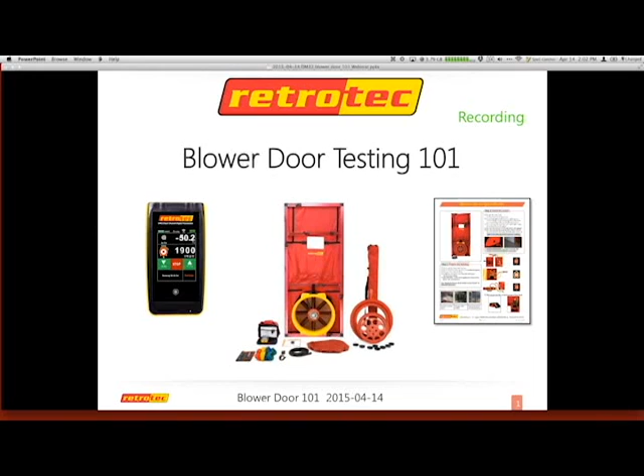All right, so today we're going to go through some basic reasons to test. What are some of the code requirements? BlowerDoor quality control, how to test out of order, ways to ensure accuracy of your gauge and your fan, and common test problems and solutions.

I found that many of these things are very helpful when I get people responding about issues they're having or conditions they've learned or solved. I thought there was another slide that may not have shown up, so if there's something you want to make sure I'm addressing, let me know. I did not do any polls today because sometimes I feel they get in the way, so I'm just going to ask you some questions and hopefully get a response in the question and answer area.

For those of you that have the DM32 Smart Gauge, which will be one of my questions in a minute, make sure your firmware is up to date. You plug in your DM32 with a USB cable to your PC, open the gauge configurator, and it will find your gauge. If it doesn't find your gauge immediately, unplug it and plug it back in. If this is the first time and it has a hard time, or you get funky sounds acting as though it cannot find your gauge, you may need to update or make sure you have the right drivers installed. All of that can be downloaded from the Retrotec website.

Right now they are currently on version 49. You can see that on your gauge if you go through settings on the last screen - it'll tell you what your firmware is. So you want to make sure you're up to date on your firmware, and this is something you definitely want to check at least once a month.

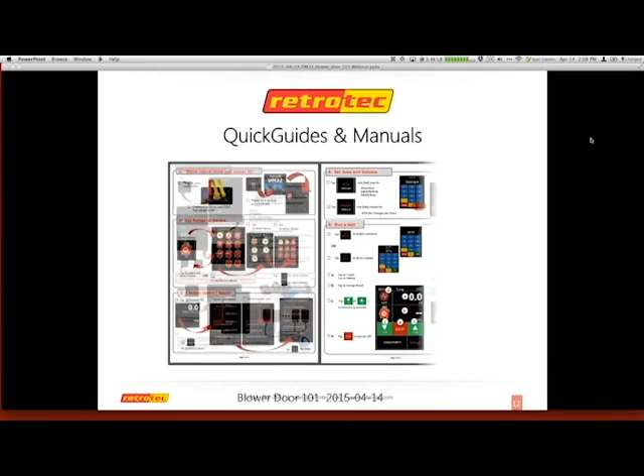As this slide goes around, I have a few questions I'm trying to find out. First one is, where are you? We reached back out to our European allies and friends, but somehow they were not on some of the email lists that were sent out. So what I'm trying to find out is, what state are you in, what country are you in? That would help me orientate my session today as to what kind of folks I have out there. We got a few from Texas and Indiana.

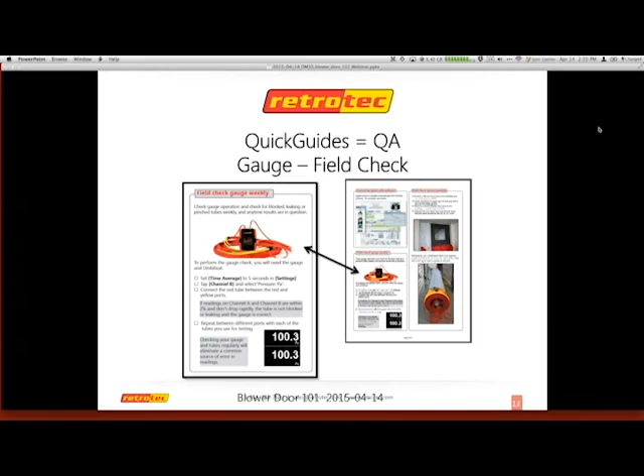One of the things I do want to remind people about is the DM32 will control Minneapolis fans, right? The duct blaster or the blower door version 3, the 220, or the 110. It also does the true flow grid or the exhaust fan flow meter. All those things are actually able to be accessed on the DM32 smart gauge. For those of you who have the DM2, it would read these devices, but it would not control them. So now there's actually an adapter that can be used with the DM32 smart gauge to do that.

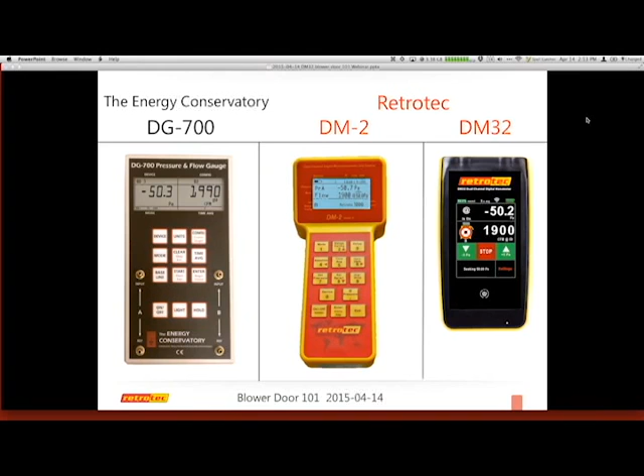Okay, so if you could let me know what's your market sector. I know this is kind of a, Jay West hates the word industry, but it's kind of like, what's your industry? Are you a HERS rater, BPI, weatherization, code official, just energy auditor, oversee programs, HVAC contractor, anything that fits any of your descriptions on how you may describe yourself when you're at church or a social gathering. That would help me a lot.

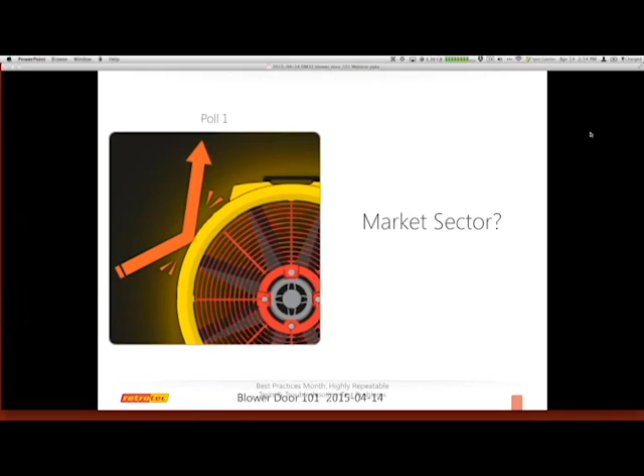It lets me know where you're at or what you're doing. And how do you describe yourself in your job title? They may be one and the same, but my goal is to kind of get a feel for what kind of folks do we have out there and what you're doing.

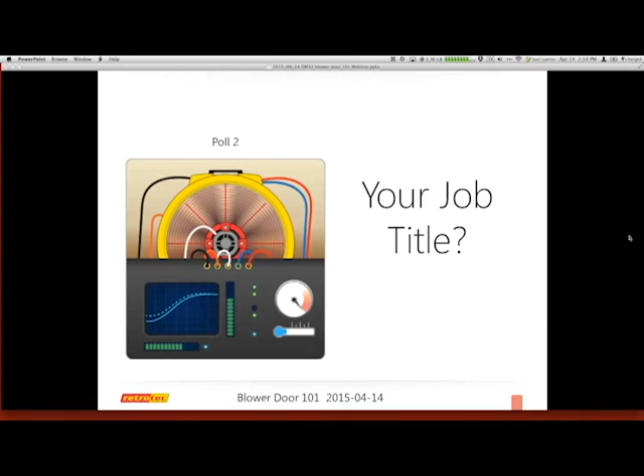So many things we'll be talking about are very similar to BPI protocols and HERS applications. So some people may be more administrative that are on our call today, some may be actually in the field. So my goal is to make sure you understand a variety of stuff.

So I'm going to start first with the QA part of this, and that is how to do a field check on your fan. How do you know that your fan is working correctly?

So it's easy to check your gauge because you can actually take tubing from one side and put it in the other side and go back and forth. But your fan is a little more challenging, and your gauge could be off by 1 or 2% in theory, and it will not affect your results drastically. If your fan is off, that will actually skew your results much more extremely than your gauge could. Because even when you extrapolate 1 Pascal in terms of the CFM, it's not a large result. But if your fan is off by 10%, now you actually have a large discrepancy as to what your results might be. So here's the scenario.

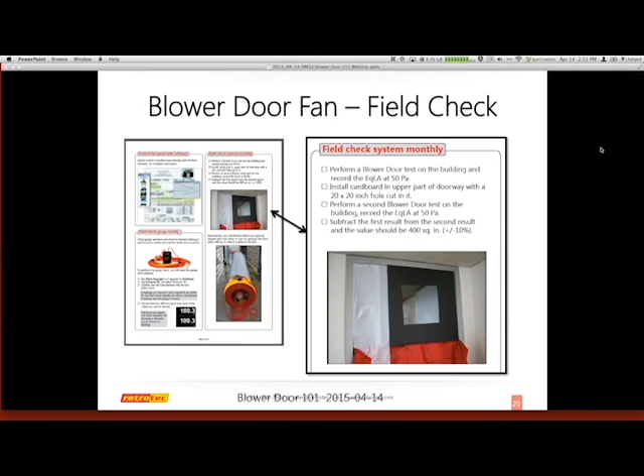You can follow the quick guide on how to do that. These quick guides can be downloaded from retrotec.com on the same page under manuals and quick guides.

So what I'm going to do is set up my BlowerDoor in a small area. You can use a bathroom, you can use a closet, it works best, a very small bedroom. The smaller the room, the easier it is to actually do this type of a test. What we want to do is test the leakage of this room to try and find out what it is and use that as a baseline or a neutral number. And then I can use that in terms of subtracting how much leakage it has.

So what I'm going to do is set up my little room. If you're going to use that bathroom, you've got to make sure you cover the register and the fan, because those are actually leakage points that you really don't want to have. So if there's any kind of opening that's a known opening in this little room, it should be covered in general.

All right, so here's my process. I'm going to take the room. What I did was actually cut a piece of plywood. You can use a piece of rigid cardboard, you can use a variety of things that are firm enough to handle the wind in the test itself.

I went to the gauge, under results to be displayed. You can access this by just tapping channel B, or under settings at the bottom, you can do results to be displayed. Then you tap the little dots, and the second screen shows EQLA in square inches.

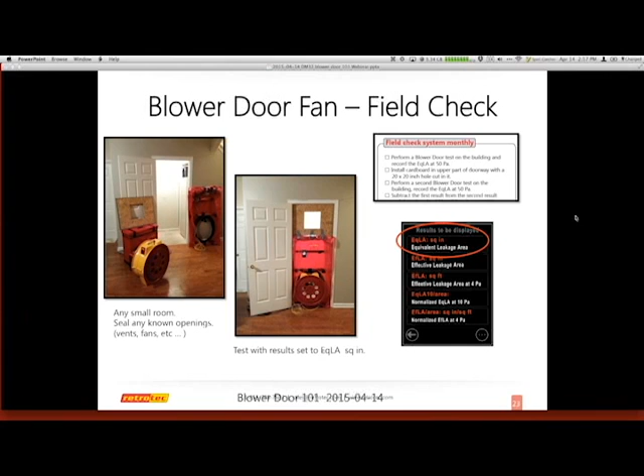I know the opening I have is 12 by 12, so that's 144 square inches. You can test at 25 or 50 Pascals, making sure everything is secure if you're going to go to 50. The results of my first test with the opening in my cutout gave me an equivalent leakage of 168 square inches.

That's actually what I measured. Then I'm going to cover the opening and do the same test again, and now the only thing I'll have is the background leakage. My results were 24 square inches of leakage that's naturally in the room.

So what I do is take my 168 square inches, subtract 24 from it, and I get 144 square inches. In this scenario, I was dead on, just to show you what the numbers could look like.

So again, you test it once, and you can do the same pressure for each test. Test it once with the opening so that air is coming right back at you once it fills up the room -- I'm blowing into the little room itself -- and then I can cover that back up. My goal is to find the difference between the two.

This is a great way to practice or play with your blower door. Sometimes on cold days, or other days where you don't want to mess with the conditioned air in your house, you can use this same method.

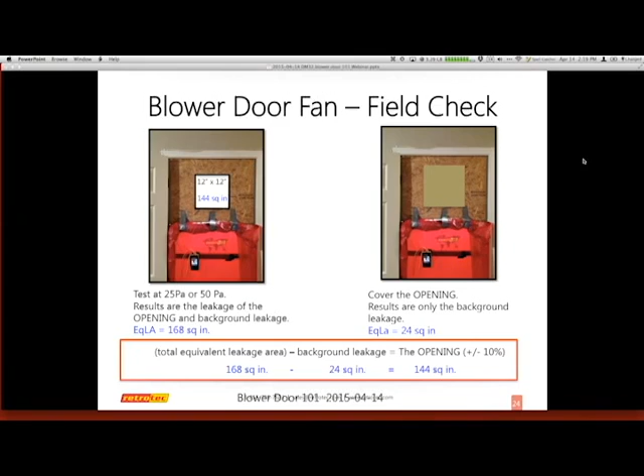Some of the reasons people test are to do energy audits, find conditions, improve the performance of the house, or for a variety of code requirements.

I appreciate all of the European folks that are out there. I'm not as savvy or up to date on some of the testing protocols that you guys are required to do. In general, it's a blower door with a number and a criteria.

But some of the stuff I'll talk about is mostly the American energy code, and I've been instructed to get more up to date with your codes. Starting next month, we will have these same webinars designed for your specific standards, using your same types of units of measure.

To me, there are two ways of doing the test. Let me go back to this slide previously. So if I'm going to do a code test or a RESNET test or something with a specific standard -- the European equivalents, France has theirs -- there's a lot of them out there, and they have a protocol to follow.

Or I'm just doing a test to see what the performance of the house is, usually an existing home. I have two options -- I don't really have a slide for that, but it's a discussion in general. If I'm going to a house that's an older home, it may have suspect conditions or a variety of issues, and I can pressurize or depressurize. Those are your choices on how you want to decide what type of test to do.

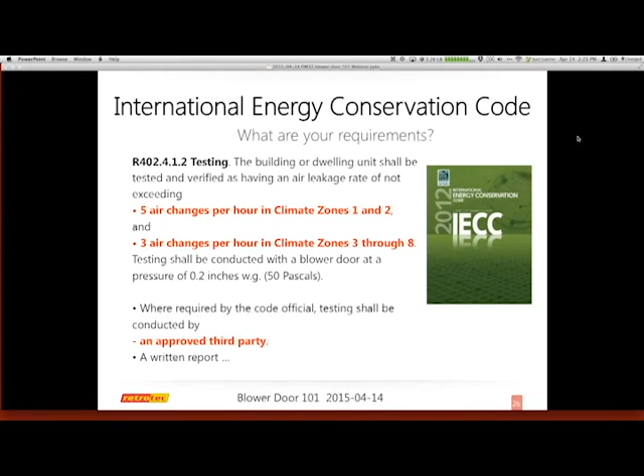So who gets to do the test is dependent upon your municipality or what your code official is, or who's allowed to do that - it's very vague and has its own criteria in general. Most people accept, obviously, an energy code official to do the test. Some allow BPI, HERS raters, or other similar certifications. Some are beginning to allow the manufacturer certification.

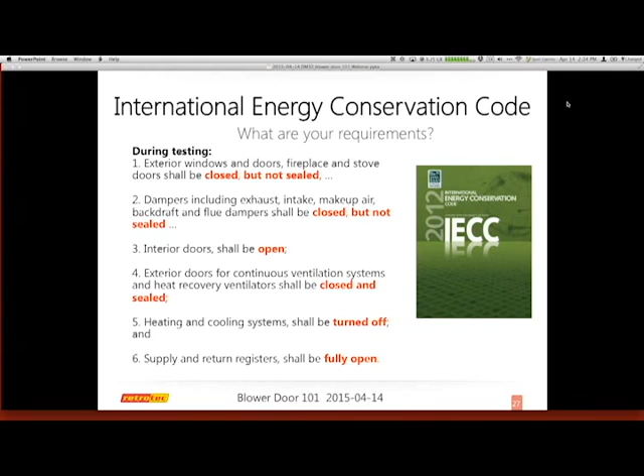What you need to do for a blower door test for the energy code is incredibly minimal. It basically just says that windows or dampers or interior doors just basically opened or closed, but nothing can be sealed. If there's a dryer vent missing from the laundry area, you're not allowed to cover that opening - there's a damper on the other side that should now be in effect. So it's basically as is - your goal is to seal the house up on the exterior shell, open the interior up, and now you're actually ready to go. You do not seal the registers, to make sure we're on that same page.

So for the IECC, there are some very large items that are missing, and I think they've realized this and are working on a better testing method.

So there's nothing about combustion safety. They kind of feel as though it's a new house and those things shouldn't really exist, even though gas is probably on - the furnace and hot water tank have already been prepped and ready to go. This is ready for occupancy, and you're coming into your test. So you do want to make sure a variety of things are either off or not able to come on.

It doesn't cover issues about baseline or windy days. What's the technical way to measure the structure? What are the equipment requirements, the certifications? A variety of stuff has kind of been left out. So I think in the next scenario, which is going to be the 2018 code, these things will begin to be resolved.

Just for a general comparison here, the energy conservation code in general for residential is about 11 to 12 pages. It's not a large, exhaustive document, but the part that covers testing is only about a quarter of a page.

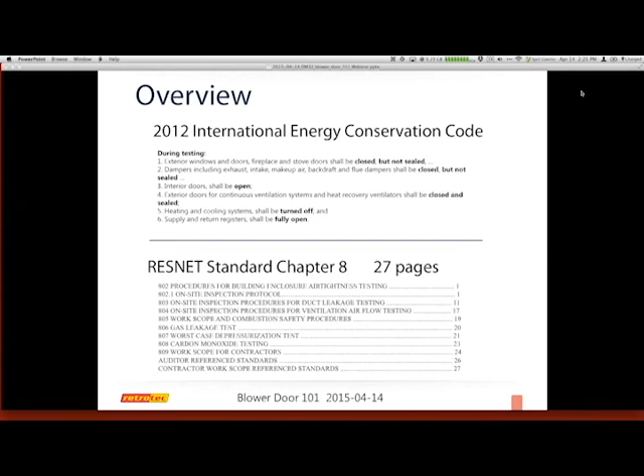And if you compare that to the RESNET standard of Chapter 8, it's about 27 pages that covers all of the details on how to do a blower door test. So I think you're going to find that these two things are going to be slowly merging, and the code will start to adopt many of these conditions that RESNET has or many other testing standards have.

I'll do some things briefly about the air barrier and some other stuff.

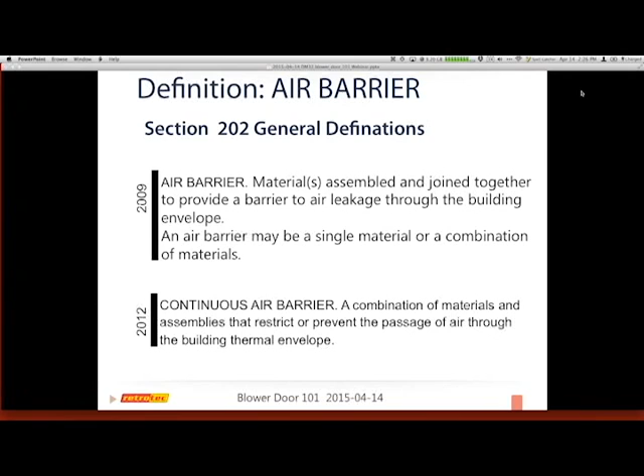In the code, there are these definitions about air barrier. 2009 introduced that - the black lines on the sides of most code documents mean it's either new or changed. In 2012, they redefined air barrier and then added continuous air barrier. So these are things that are in the code itself.

One of the things we want to talk about is some of the challenges of making sure you're passing this test, no matter who or where you're doing it. The IECC has 17 items that you should be air sealing, checking, and doing. If you're working with a new contractor in new construction, this checklist is an enormous leap in terms of trying to make sure things will pass later.

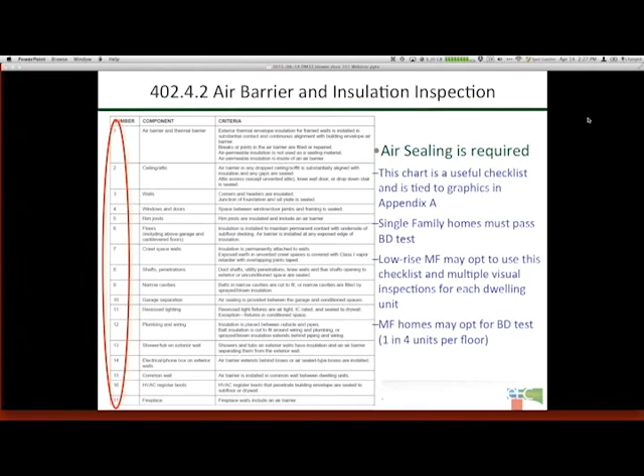Because once you go just before occupancy and you do a blower door and it fails, you are struggling to figure out where to go to find all these leaks. I'll give you a couple of ways to do some checking at the end, but at that point you're really cutting open drywall or trying to find some large issues. But if you went through this checklist and worked with the builder, or they did it themselves, to make sure these areas were sealed, it's a high degree of success when these things are actually addressed.

Some of them are very large holes. Southface here in Atlanta, Georgia, has these phenomenal illustrations that talk about all of these air sealing locations, and all the numbers actually coincide with the numbers that are in the code book itself.

So you can see all of these great little areas where things should be sealing - from behind the tub, below the tub, around a variety of other openings - all actually add up to a high degree of passing.

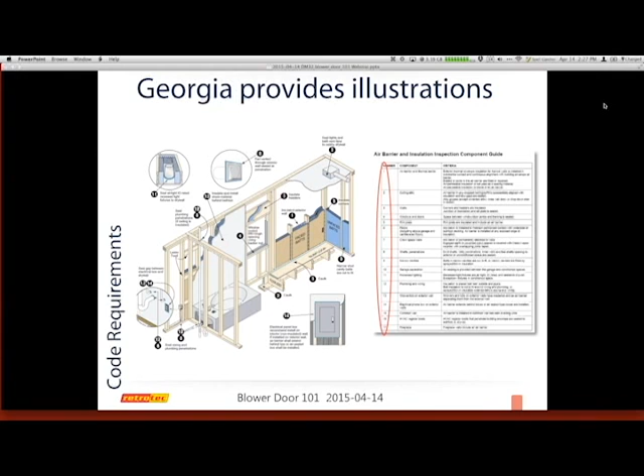You can see some of these that have changed from air sealing and adding additional layers. In the attic, it used to just be exposed insulation on the knee walls. Now they've tried to put up an air barrier that's sealed on the attic side, so it's a lot easier to add the insulation from the interior.

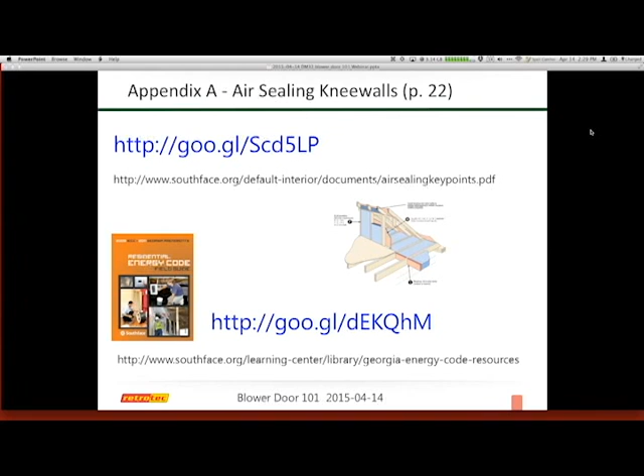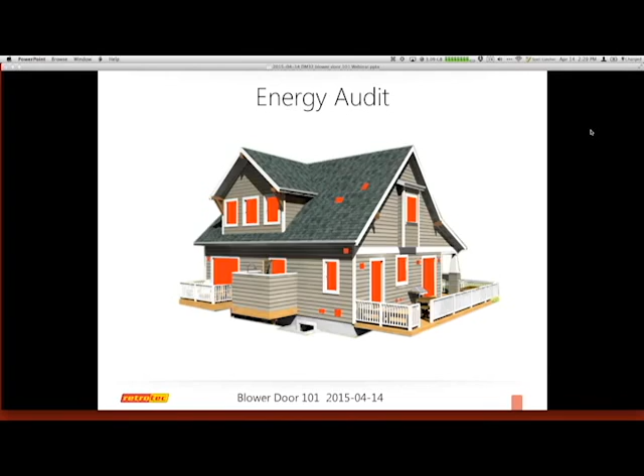So the reason we're doing an energy audit or a blower door is because we take these nice homes and they probably would be fine if we didn't have any windows and doors - they'd probably be fairly well sealed. I'm sure they'd still have a few issues or connections internally, but we cut all these holes in them and then expect them to still be fairly tight, not have a lot of issues with leakage. But the reality is, I kind of feel most of our houses are more of a Swiss cheese kind of concept, and it isn't just from the shell or the outer perimeter.

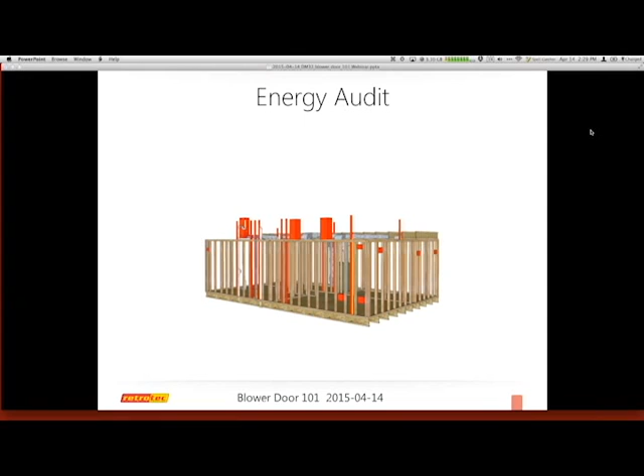It's also conditions that exist on the inside. So we have a variety of issues that go from floor to floor, or floor to attic, or floor to crawl space. These are many of the penetrations that actually cause problems that we can find or isolate when we do a blower door. Many of these go up to the second floor or to the attic, and it isn't always just the perimeter that's our leakage issue.

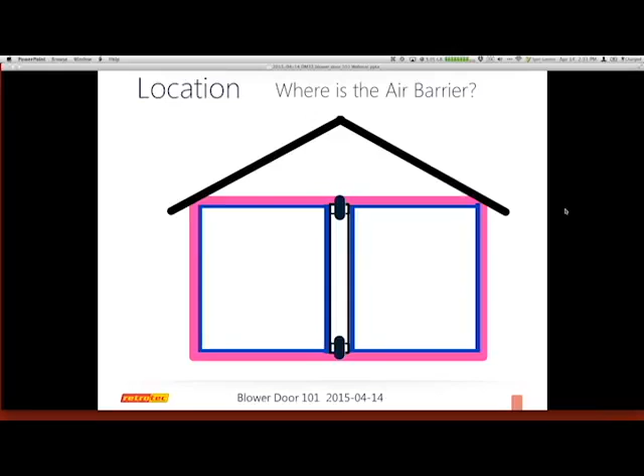But instead, we decide that we're going to add a bunch of rooms and partitions, and now you can see how the air barrier has been chopped up. Notice that the air barrier did not actually stay with the thermal boundary at the top or the bottom. And of course, the next contractor comes in and wants to cut a bunch of holes and add some wires, some ducts, and a variety of other stuff. So these are the things that actually make our homes the Swiss cheese factory that they are.

So now I can have connections from a crawl space, or at least down to the interior, up to the attic. We add a duct system or can lights or junction boxes. Again, all these things are all cutting holes and openings into our air barrier. And these are all the kind of things that we're trying to measure.

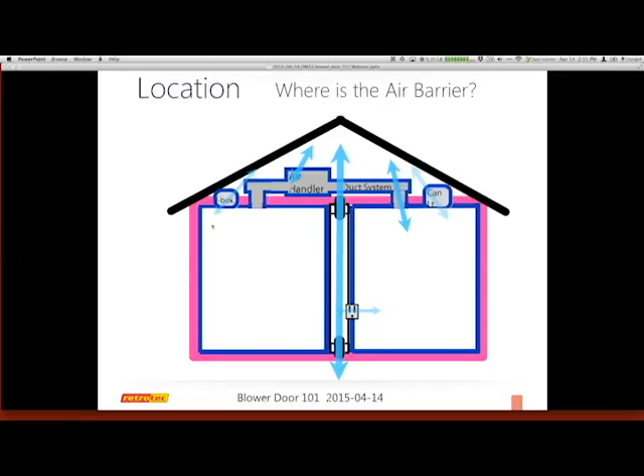So if it's new and I'm trying to pass a certain code criteria, or existing, what we really realize is that what we have now is actually the air barrier. If you follow it around, it then is part of the junction box, or part of the duct system is now your air barrier, or the can light. All these things that actually penetrate your air barrier down below then become the air barrier above.

So not a lot of people realize that your duct system, if you have any kind of air handler or metal duct system in the attic or crawl space, when it penetrates, it then becomes the air barrier itself.

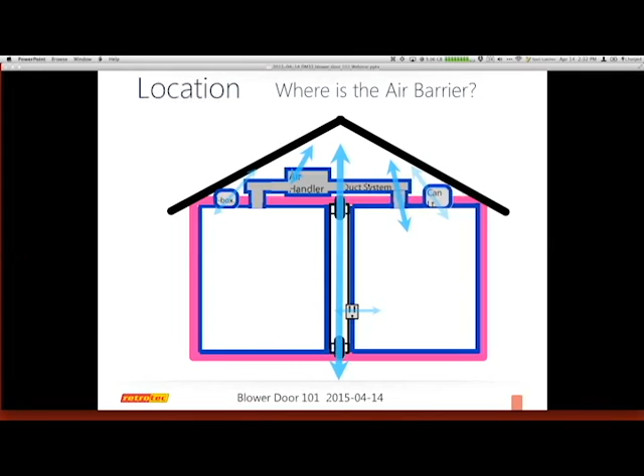So in general, we set up the blower door, and it's in the front of the house. It could be in any door that will work as long as it has a clear path on both sides. That means there's not a lot of restrictions in the front, or on the back side. So if you have a home that has a real tight hallway right behind the door, it can also be very restrictive in terms of your test. So I want to make sure that I have lots of airflow on both sides.

You can use a garage door as long as the main overhead garage door is open, or a back door, and the door is secured.

So you can see where, when the blower door and I'm depressurizing the house, I'm actually pulling air out of the house through the fan, and it will measure the pressure. And what happens is that pressure then is converted to a CFM number. So it doesn't actually measure CFM, it actually measures pressure inside the fan. And then that pressure is converted through the calculation similar to what we did earlier with the hole above the blower door when we were doing a kind of a calibration check. It actually converts that pressure into a known opening size, or into a CFM.

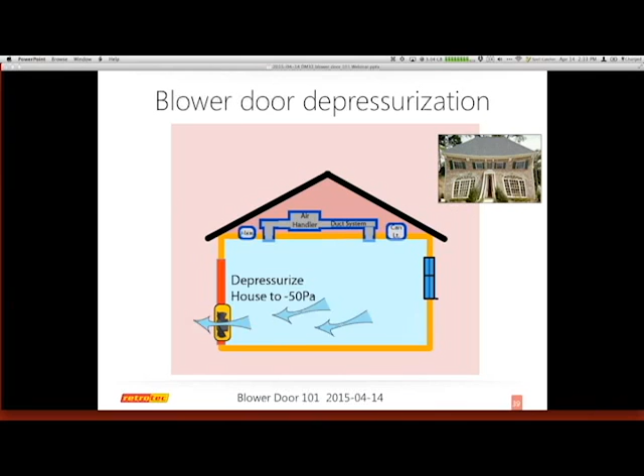So this is, in general, the visual on how the duct system becomes part of the interior and the air barrier itself. That may be the same one.

So we talked about air changes per hour. While the blower door is actually going, it is able to calculate when it knows the volume. You have to actually put the volume into the gauge because the gauge will give you this information automatically. So the gauge gives you your code results for duct testing and blower doors.

So you can actually go to your results to be displayed and you can pick air changes per hour. You have to enter a volume. So you must know the volume of the house, that's the conditioned area. And so then I can actually run my test and it'll actually calculate the air changes per hour live as I'm doing the test. All the things that Retrotec has always offered, I felt that this was one of the most valuable things in their gauges.

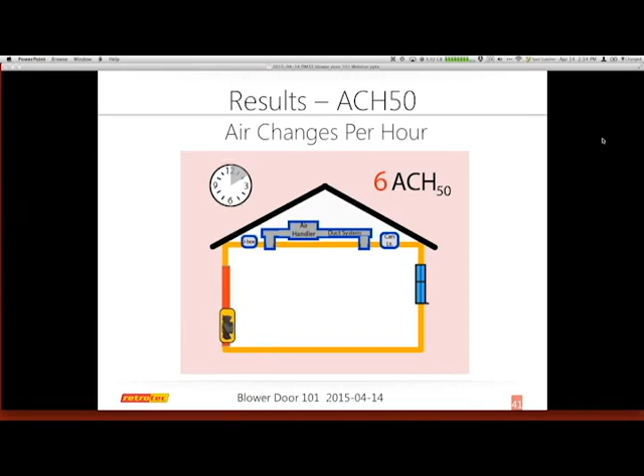The DM2 has it, and the DM32 does it, and it's a phenomenal resource in terms of people who do code testing. So once I have this number, now I can determine if I'm actually compliant with the standard that I'm after. Some other standards are actually leakage per square foot of the surface area and a variety of other conditions, some of which are in the gauge, some of which are always being added to.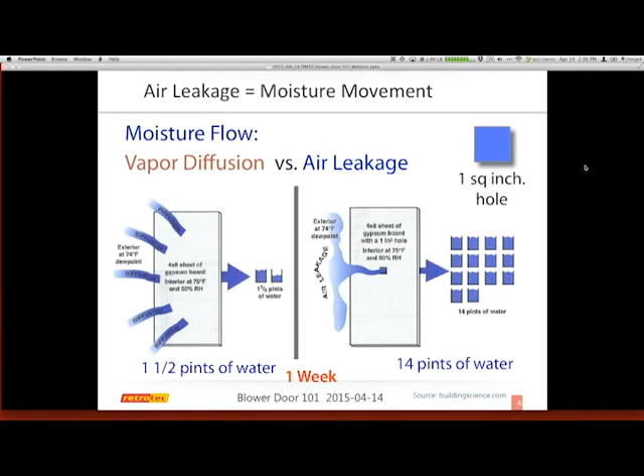So an average home, even if it's fairly tight, still has around 2 square feet of openings if you gathered them all up and put them into one. Older homes can have anywhere from 3 to 4 square feet of opening. You can imagine the amount of moisture that moves through these homes, and that's a major load for your HVAC system and comfort issues. This is one reason I always preach that the blower door is a major tool for HVAC contractors.

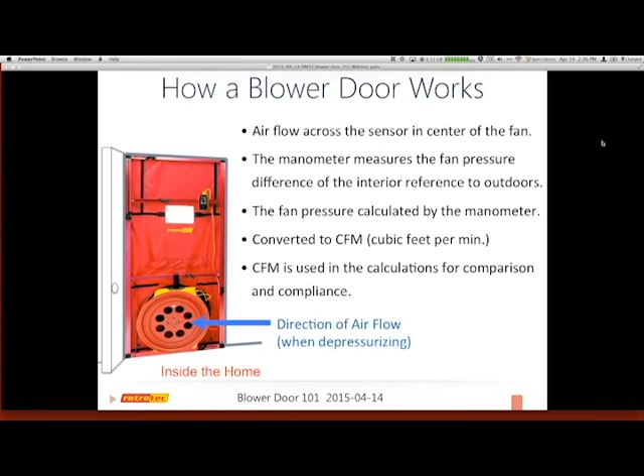So in general, here's the theory: I set up my blower door in the area. Right now we're inside the home, so it's pulling air out of the home, and there's a small opening or orifice in either the rings here. I have a ring I can change so it knows how large the opening is, what kind of pressures are moving through it, and then it can calculate the CFMs. This allows us to compare home A to home B, or retest a home and come back to it again.

It's just a great method of standard measurement. Nothing's perfect, but it's a great tool for evaluating leakage. Is it 100% accurate? I don't think many things are, but it's one of the best tools we have to evaluate envelope leakage or a variety of other diagnostics in the house itself.

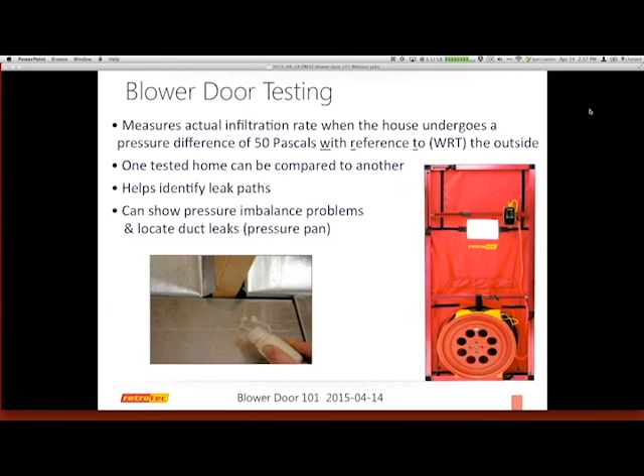I have another visual on how we try to create a pressure difference from inside to out, which I'll use as an example of how we're going to use diagnostic tools later. So the blower door is pulling air out of the house, and I have a 50 Pascal difference from inside to outside. That means all of the openings, in theory, are bringing in 50 pascals - it's more of a concept than exactly how you do it.

The point is, I can now go around and actually try to find issues, which we'll come back to in just a few minutes. This is the concept we're trying to see - if I have this test operating and active, I can go around and check different parts of the house to find out what is outside or what is connected.

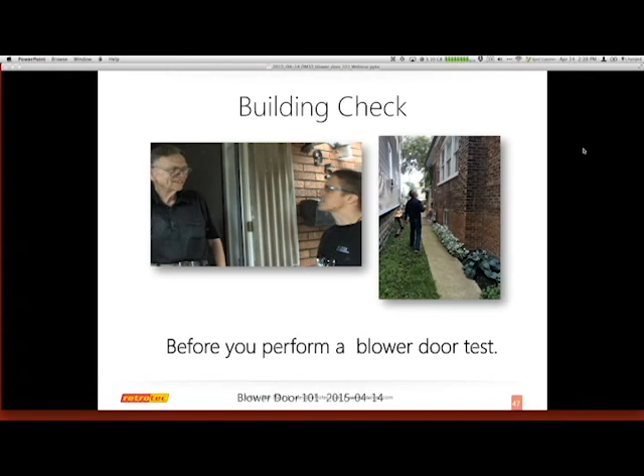For the test itself, you definitely want to check your building before you perform a test. I'll ask a question here - and to be honest, I don't go back to anybody, I just try to see who's willing to admit: before you operate your blower door, do you do these few things? Do you fully evaluate or at least poke your head in the crawl space or the attic? Do you acknowledge what kind of condition the duct system might be in? Are you locking the doors and windows? Do you check the garage?

The reason is there could be various conditions, especially in the crawl space or attic, that would not want you to do a depressurization test. Sometimes you go in the crawl space and it's full of standing water or a variety of funky things growing on the sides, and most of these kinds of structures are fairly leaky. So are you actually acknowledging the condition beforehand?

The one I usually ask people is: are you asking the homeowners if they or anybody in the house has any asthma triggers, breathing issues, or asthma in general? Because if you don't ask those questions, I personally feel you could create scenarios in the home during the test that may not be apparent immediately, but could show up a couple of days later. So I highly encourage you to ask those kinds of questions to the homeowners before you do the test, and do a quick visual.

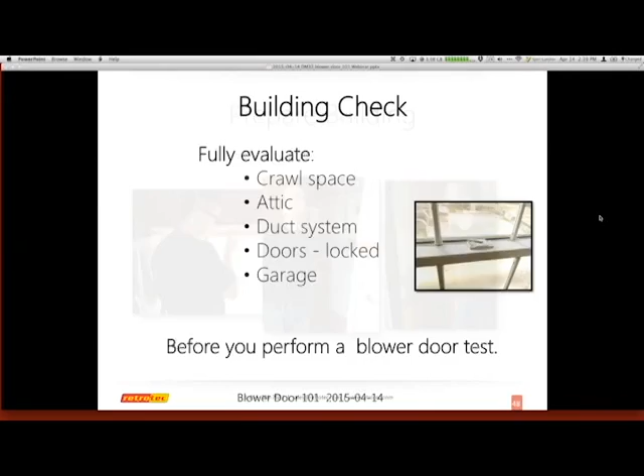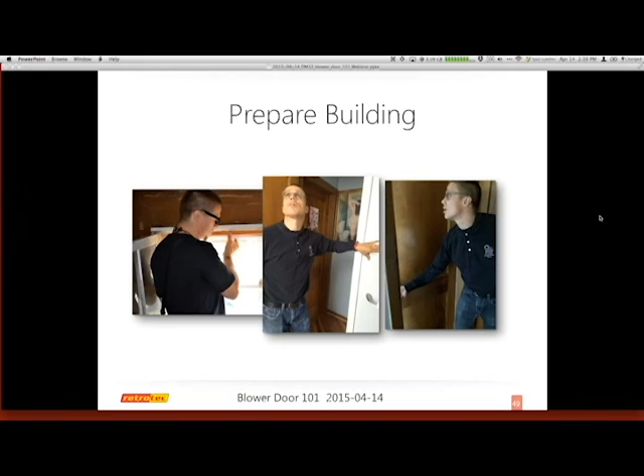So we do want to make sure the building is prepared. I know that all of my outside windows and doors are closed and locked, interior doors too. It doesn't have to have a vent or anything, but I think the entire house should be opened up on the interior, because you never know where there may be a connection that you'll be able to find or feel air that moves through.

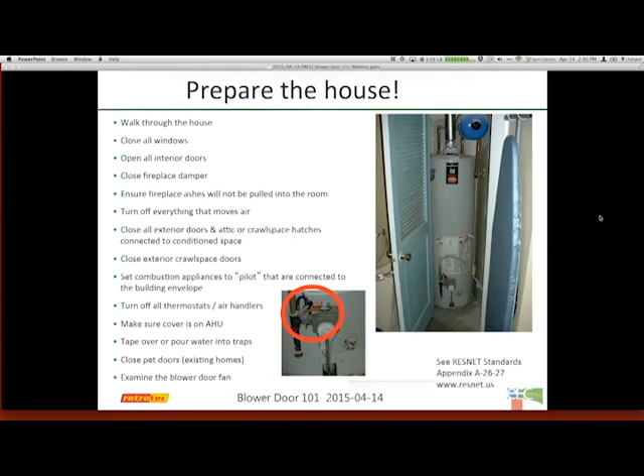Here's a laundry list of stuff to do for existing homes, mostly after combustion issues or things. Hot water tank, we're going to turn it to pilot, and as you can see by the arrow there, we want to make sure we leave our keys there, so later I don't get calls saying there's no hot water. The fireplace is your next largest risk, and you want to make sure there's no hot embers. If there are any kind of ashes, you either clean them up or put wet paper towels or wet newspaper on top of them so they do not get blown in.

Anything else that's moving air needs to be turned off or not able to be active. So your furnace or your AC or anything that can move air needs to be turned to a temperature so it won't come on, or turned off. Dryers, exhaust fans, all that stuff is off.

If it's a new home or hasn't been occupied in a while, you want to make sure there's some air... water in the traps. That means in the toilets. I mean, the toilet would be pretty dry if it needed that, but it can happen for homes that have been unoccupied for a long time or are vacant.

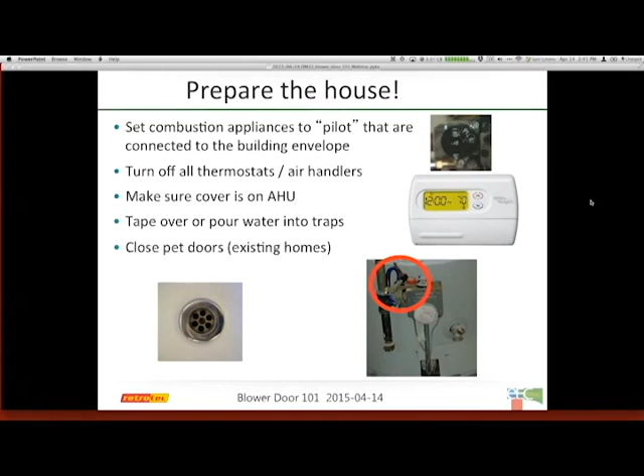Also, the tub or the sinks, their traps can be dried, and if you start doing a blower door, suddenly you're going to have some very nasty smells come into the house, and you of course blame it on your partner you're working with at the time. But the reality is, if you smell anything that smells like sewer, it is, and you need to go around to make sure you add water to all the traps to control your leakage, but also get rid of the smell.

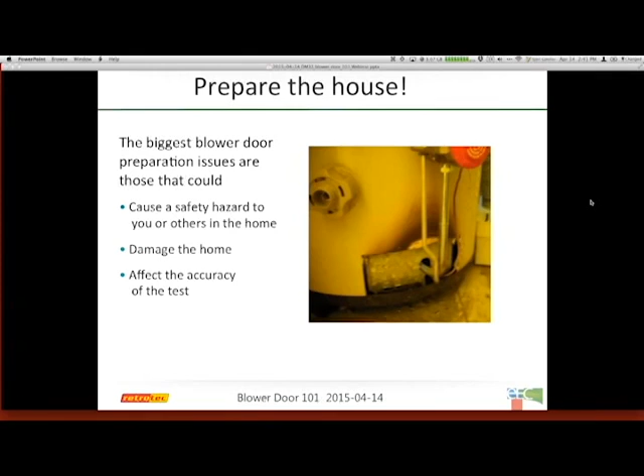So again, safety first, and do no harm should be your main criteria when you're doing the test. I would encourage you to accept that this house could not be tested in the condition it's in, repair those things, and then come back. I think that would be your greatest asset that you could ever do for a homeowner.

So you've installed the door frame. If you've not seen the new frame that Retrotec has, all the corners are very tight. They have some phenomenal, very nice rigid weather stripping that goes on the outside. If you do have this, you can actually take the entire frame and collapse it down, and what I would say is kind of rack it, just kind of tilt it to the right or the left, and the entire thing comes apart. It's a great new frame that they have. It comes with two crossbars, or you can use your thumb to pop it apart.

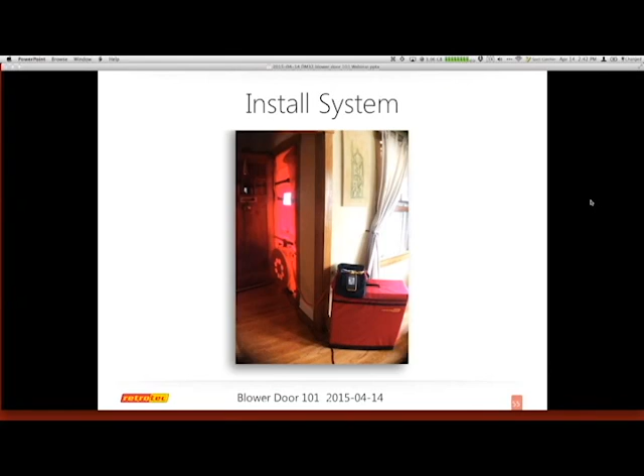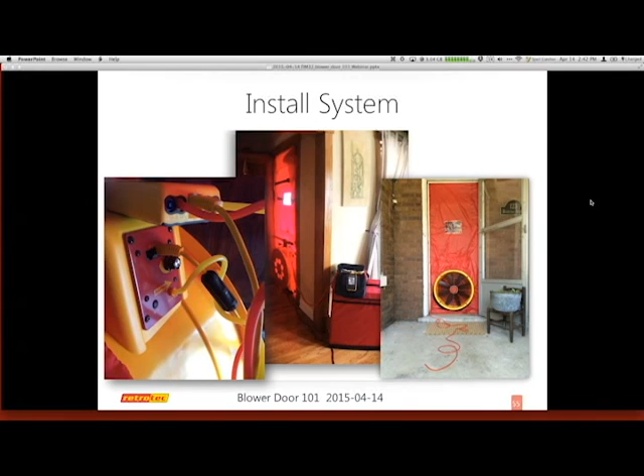So the system is installed. I made sure that my tubing, which is on the right side, does not look like that. All of my connections are color coded. They're fail resistant. You can follow the quick guide step by step to go through this.

So you want to make sure you have a blower door and the right one selected. They now are putting stickers or identifying labels on them to keep track of which one you have. A lot of people, once you have it, you just use it. But if you have several employees, you're like, well, I don't know which one it is. So if you do have that scenario, I encourage you to get a marker out and put down which one it is, so your employees can keep track of it.

Somebody did have a question out there, and they asked, what is the AHU? And that's the air handler unit, or the large blower for the furnace or the air conditioner.

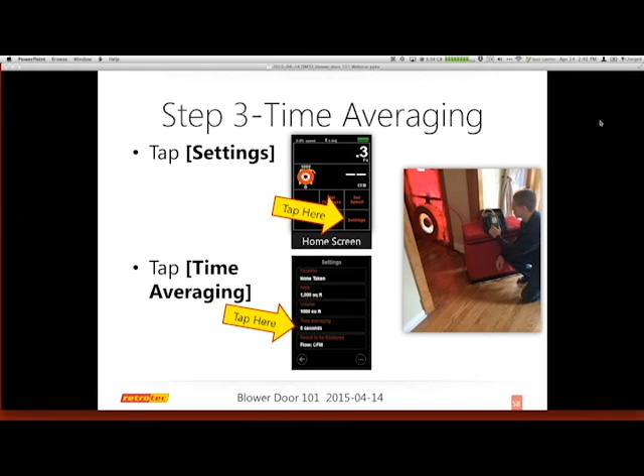If you realize that it's not a windy day, there's hardly any impact upon your readings, then you could easily do something that's as short as 10 seconds or 30 seconds, because there's not much of a change. The time average is also on the first screen in the settings. At the bottom, you can also see results to be displayed, which is the same option as we had previously.

Air changes per hour is based upon volume, so the larger the house, the easier it is for them to pass. If you have a small house and it's trying to get 3 air changes per hour and it's on a slab, those are actually some challenging numbers to get.

I've learned that many of the builders that are out there are doing it. There's a small learning curve, but they just pay attention to the details and they're able to conquer that. So if you add more volume, it's a lot easier to pass, is really the bottom line.

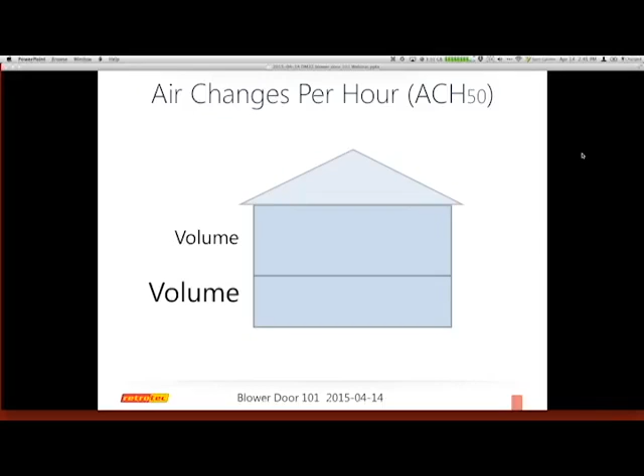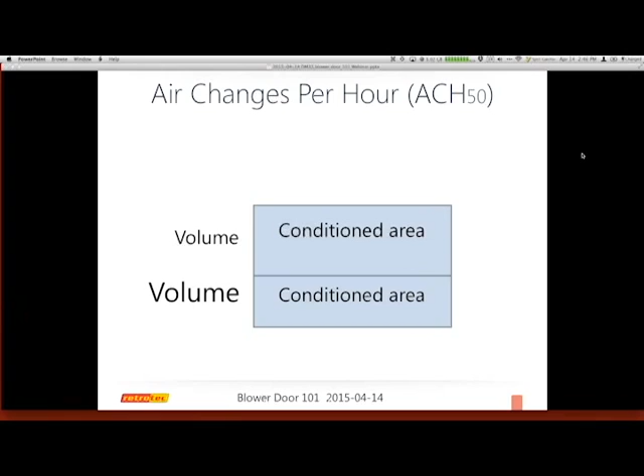So you're mostly after the conditioned area. That has multiple definitions throughout your testing method or your criteria. So to calculate the air changes per hour for the International Energy Conservation Code, the IECC, I'm basically going to do the final fan flow, which is the CFM 50 that I get from the gauge.

You multiply that by 60 and you divide it by the volume. So here I've got 1900 CFM times 60 divided by 33,000, and it equals 3.45 air changes at 50.

Or I can enter the volume and get the gauge to do this automatically. This is why I think the gauge is really very intuitive and considered a smart gauge, because of the things it can help you do with your testing method.

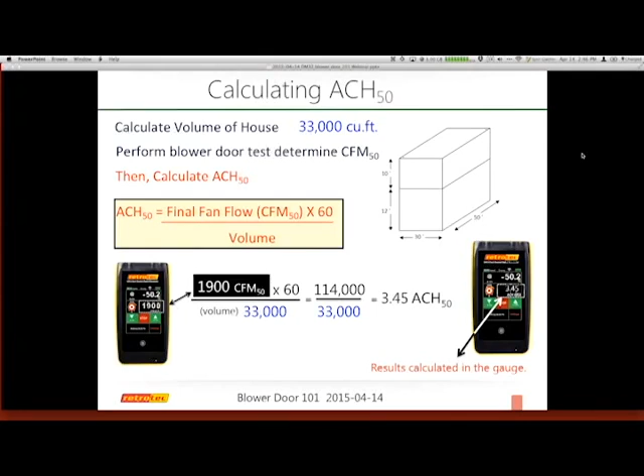Case that they have for their fan. Those are the quick guides that come with the frame itself. So the frame has a new cloth cover. You want to snap the corners together, they're all numbered and labeled. They're going to loosen the knob.

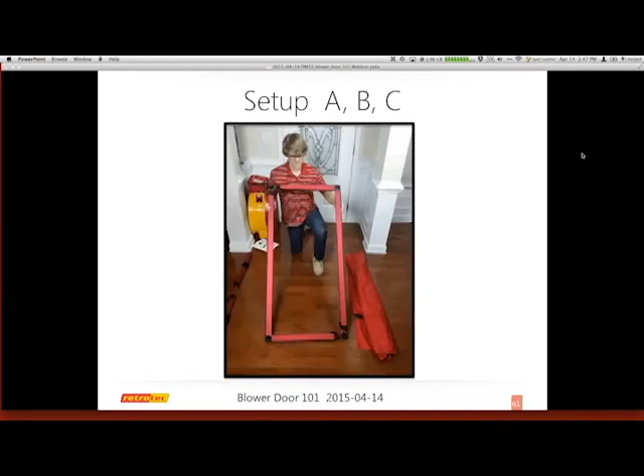So I now have the basic frame. Everybody has their own scenario or method for doing that, but notice that I leave a small gap of about a finger. There's the 2 crossbars that go with it, and one's really designed for the bottom and the top. Everything again has a number system on it. And now I actually have my frame.

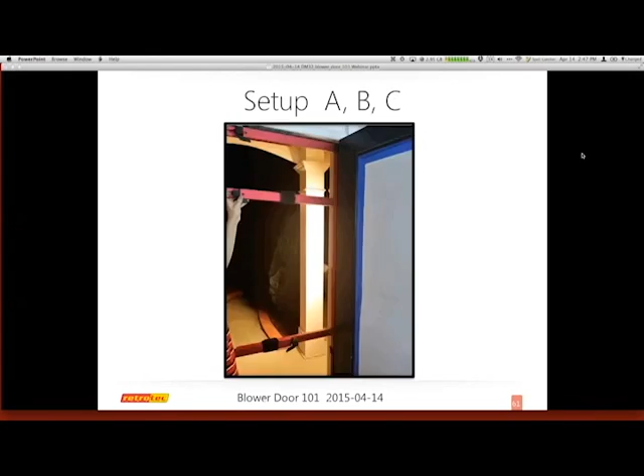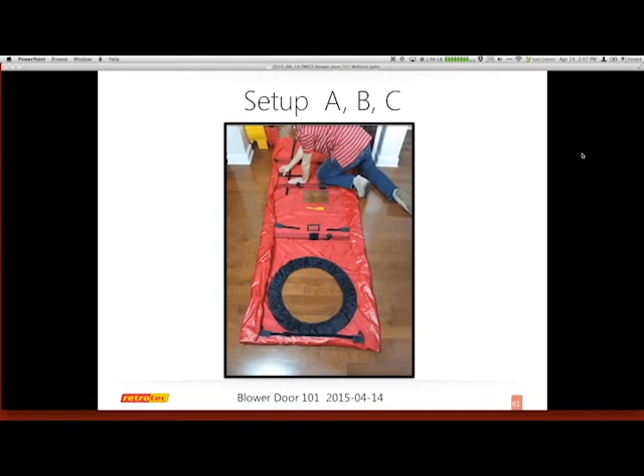I can roll out the cloth and lay that down on top of it. You do not need to stand on the cloth if you do not want to, I want to make sure that was apparent. So I'm now going to just tack it into place so it can be put back up, and now I'm actually going to secure it, putting my foot in the bottom and pushing up onto the top and across. You notice where his thumb is as he goes across there.

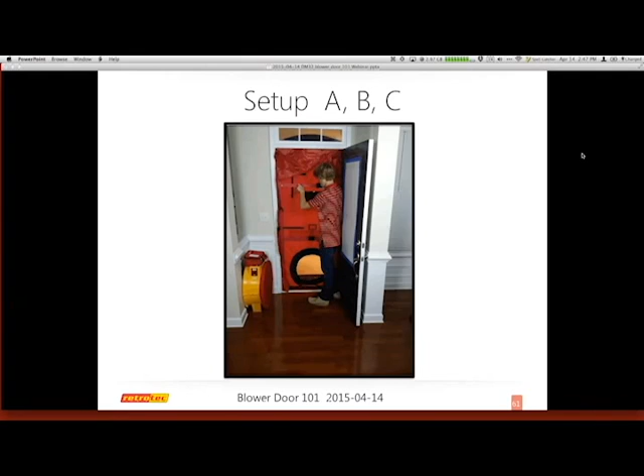I felt if I made this real time, we would be here for a long time, but I thought I could actually just go through a quick setup to make sure that you can understand how simple it is to set it up and go through any questions you might have about it. I have a few more changes I want to make on this, and then we'll have this up on YouTube.

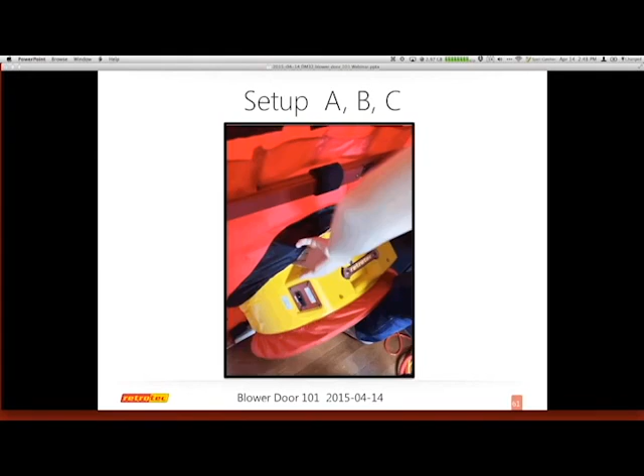Notice that the reference tube that goes outside is well out of the way of the fan, because I want to make sure that the fan is not blowing any air on it, or it's fully away from even vibrations that come with the fan itself.

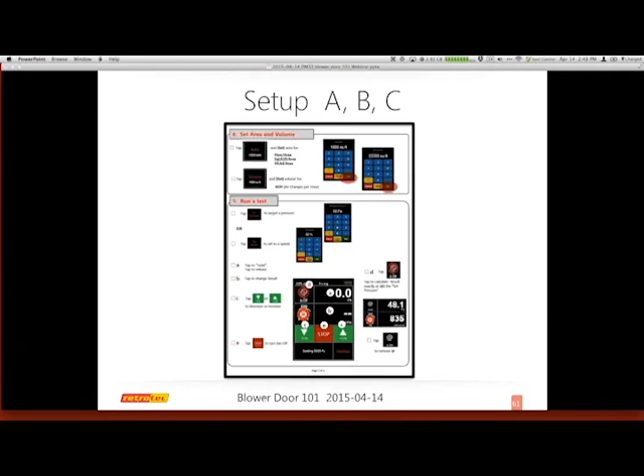So the quick guide helps you set up the gauge. I usually put it in my hand to make the connections. There's a nice new clip that allows you to hold it on the upper crossbar. Power's on, we set it up.

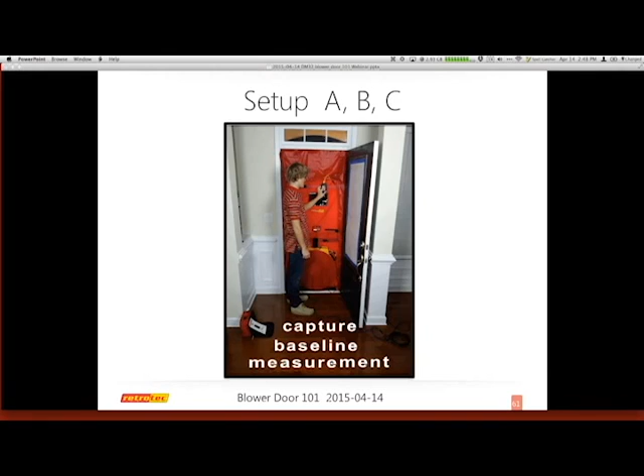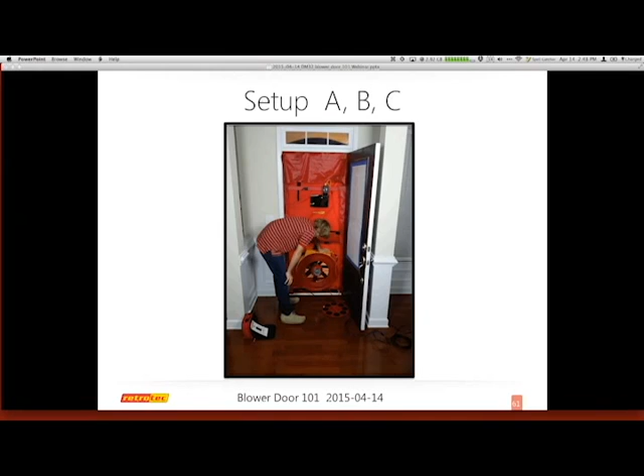Again, our quick guide is what actually allows us to do this. We've actually handed the quick guide to people that have never really done a test or aren't in the industry, and within about a half an hour, they can actually set up the test, run the baseline, get the numbers, set up the range, and get results just by following the quick guide from step A to step C.

You can actually run this test by using the speed control knob on the fan, or you can actually use the gauge itself to do that.

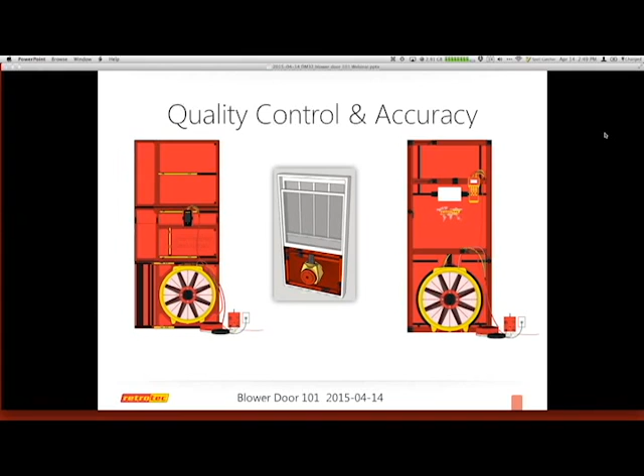So I know that went by quick, but my goal was to kind of give you an overview about how simple it goes. If my son could do it, I guess would be the question. That it is able to be done by many.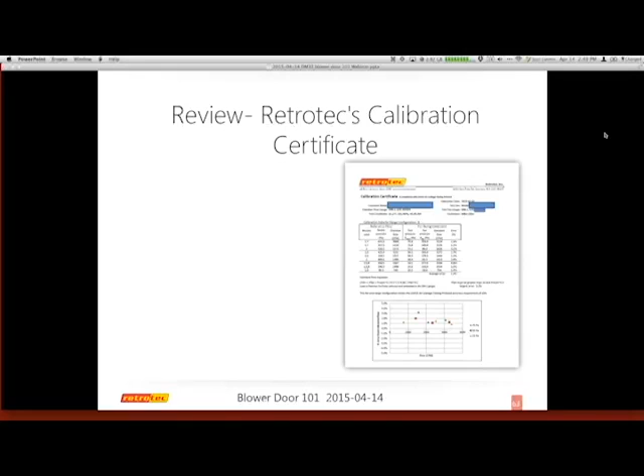Your fan and gauge both have calibration certificates. If you've lost those, you can access them. Send an email to technical support, call them up, they can be sent to you, and soon you'll be able to go access them online or share those with people. So the goal is that you would actually know that things are in compliance or could share that.

In general, if you check your fan even once a month, even every 6 months to be honest, you probably confirm that it's right, it is considered to be accurate. Checking your gauge every week, worst case every month, you'll know that usually if it's off, it's way off. It's not like, oh, I'm slightly off by a Pascal or two, you're really kind of far off.

So most things do not need to be sent back for calibration unless your training or your testing method requires that you actually prove that. So if it does, then there are reasons that you need to actually send it back.

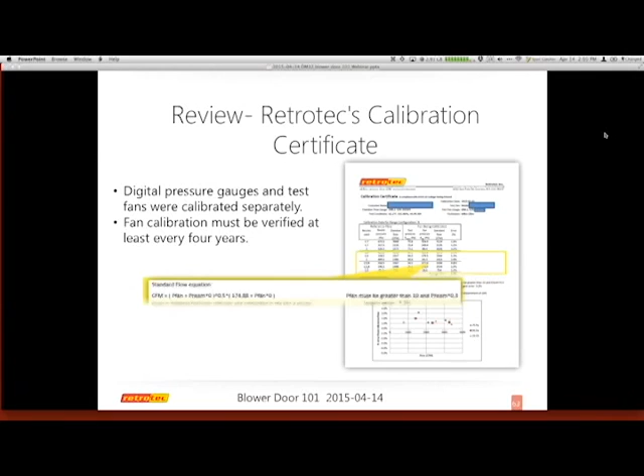So some of the most common problems or solutions is that the reference tube people have out front is on the windward side, meaning a lot of wind is blowing into it, or it's in front of the fan and the fan makes the tube vibrate. If the tube vibrates, it will actually adjust or fluctuate your measurements. You can take any manometer you own, connect a piece of tubing to it and just shake it, and you'll watch the numbers vibrate or change - that could be the same condition as the fan blowing on it or in front of it.

Somebody asked in Europe who can calibrate. I don't know the answer to that. The only thing I do know is that only the manufacturer can do that. I don't know if you need to send that back to Retrotec or if they actually have somebody over there that can do that. So I would say if you could send an email, Timo, to follow up on that, that would be the answer. I don't know that, but that's something I will make sure I know for the next time I offer this webinar.

So this is one of the most common ones. Let's say that this is the only door that actually is practical that you can use, none of the other doors allow the blower door, so I have to put it on a windward side. It may be challenging my results, but I don't have to have the reference tubing on that same side of the house. That tubing can go all the way around either way you want it to go, even to the back of the house.

You would really prefer to have that tubing not in the wind. So there's a different method you can use, or you can just extend the tubing so that it would go all the way around to, say, the leeward side of the testing home of that day.

I do have a few slides about how to use a pressure pan when you're doing the blower door. The pressure pan is actually just a large piece of plastic, kind of looks like a cake cover.

You can make your own with some weather stripping around the edge and the ability to plug tubing into it. So what happens is I get the blower door up and running, I have a pressure difference of 50 pascals, and I get my pressure pan, which you can see an image of here. It's probably about 14 inches square, and it's on some kind of small pole.

I can put that over the ducts or any opening in general, you can put it over the exhaust fan. Again, nothing is on right now. This is the same time that I do my standard blower door test. So what I encourage people to do is do your blower door test, and while your test is running, I get my numbers - I can find out my air changes per hour or my EqLA or whatever I needed for my requirements.

And then you pick up your pressure pan. If you have a second gauge, it's very easy. Otherwise you can use the speed control on the fan to get your fan going to 50 and walk around with the gauge itself to 50 pascals. So while I'm having my fans at 50 pascals throughout the house, anywhere where I have these openings...

I'm looking for large numbers to confirm that I have leakage or connections. So I have these orange areas which are showing some leakage. Here I actually have a fairly small number, 0.9 pascal - anything less than 2 is considered acceptable. Here I have 6.8 - there's definitely a large leak in this duct system right here. And I go to the last one, and I got 1.1, which is still acceptable.

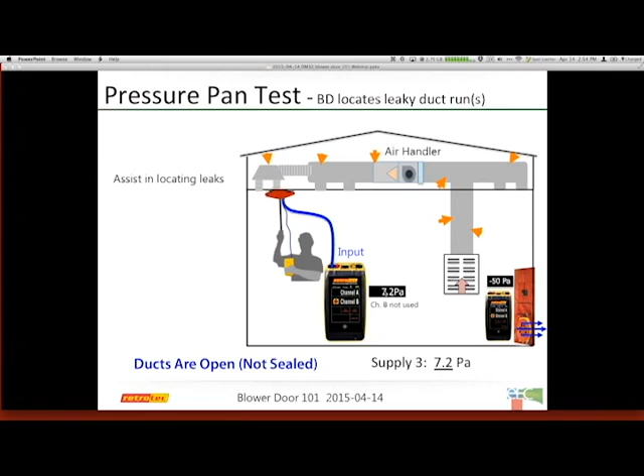This can also be used in various places. If I have maybe two bedrooms that are side by side and I find out they both have a high leakage number - this is 7.2 and the one next to it is 7.2 also - I actually now know that when these numbers are the same in the attic, there must be a place where they come together, and that's where my leakage is. So it's not actually in the individual runs because the numbers are so identical.

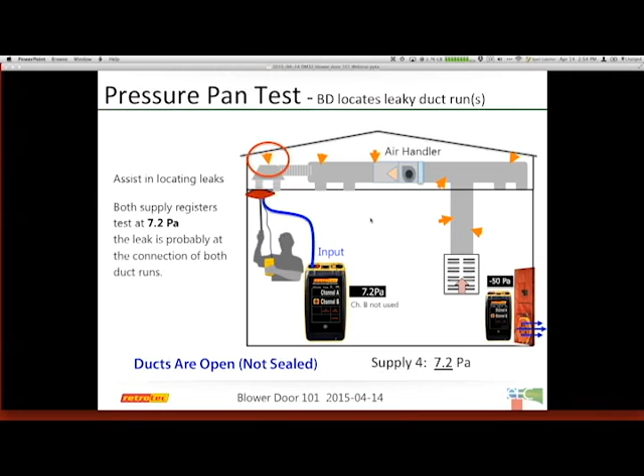So one of the things you can do is, instead of doing my ducts, my blower door is also running and now I can test other openings. It's hard to do a ceiling fan because the fan's kind of in the way. You can use small little pressure probes to get inside areas to find out what they're at.

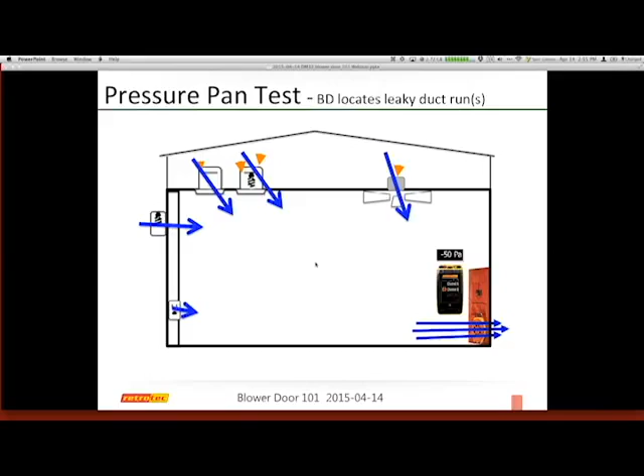You can also do zonal pressure, which lets me check how connected the garage or the attic is to the interior, because anything that would measure 50 - we go back to that slide I had a little while ago - so if I had a negative 50 going out here, that means anything that's 50 coming in is considered outside. And I'm actually referencing the house itself.

So you can see that my blue tube is going to the input and the red reference is just the house itself. So when I put my pressure pan over this can light, it measures 50.2 pascals, which means it is directly connected to outside, has a lot of leakage on it. I can actually move that all the way around and even go over to receptacles or switches or any kind of opening, and the closer I am to 50, the more I am to outside.

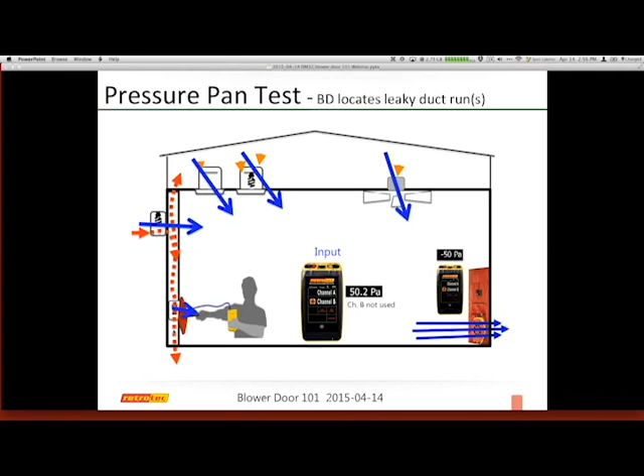So if I have a receptacle or switches or other things, you actually can feel the air. But if I really want to quantify what kind of numbers I'm getting and what kind of connections I have - that could be connected to the attic or the crawl space, or maybe there's a light fixture on the back side of that wall - you can also do it on interior walls to find out what kind of connections they have to the attic.

So here's one of the questions we had: is it okay to run my reference tube straight out? Obviously, it is not. Not only will air blow directly into it and affect your readings, but it will also vibrate your hose. So this is definitely a no-no. You want to make sure it goes far off to either side and does not sit in front of the fan.

That wraps up our hour. I'm going to see what I got next. What I do have is a few slides on software. I'll go through those kind of quickly and answer any questions you might have.

One of the things we'll talk about is if you have a Wi-Fi gauge, if your gauge is a DM32 and has Wi-Fi options, there are various software things you can do. One of which, I can use a PC to control the fan from anywhere in the house. The gauge itself creates a Wi-Fi signal, your laptop creates a Wi-Fi signal, or I can actually have a router create a Wi-Fi signal. So there are different options on how I could make this connection between the network.

Once I'm doing the connection and I am on my PC, if I have internet, then I can have options of sharing my screen with anybody else that also has internet, no matter where they're at. So if I'm having problems or want to share my results while using a PC, I can actually share my results with anybody across the world. This is becoming a quality assurance and quality control procedure that some people are trying to follow or learn to do. But again, it requires that whoever's doing the test has internet access, and the other people know how to do the screen sharing themselves. So it has a little bit of technical challenges, but it is something that is very interesting.

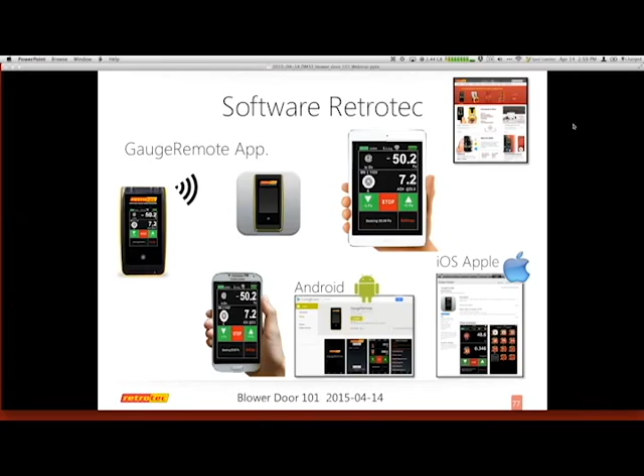Here's what's coming up down the line. I'll give a quick overview. I changed the size of the slides and they got tweaked. But we do have an app coming out in about 2 months or so. It's called rCloud. It'll work with Android and Apple, also works on your phone, tablets, anything that's a standard tablet, and also works on Microsoft Windows. But your goal is to try and have something that has a 4G connection.

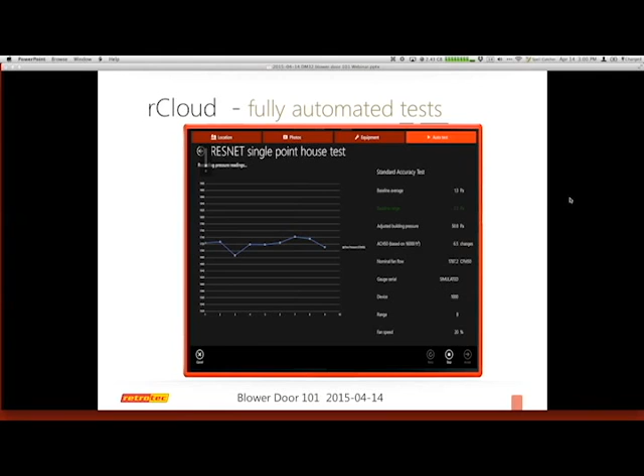You can select what kind of tests you want to do, BlowerDoor or duct tests, what type of testing method. We are working on getting all of the UK European standards also listed here for what kind of tests you want to do. You can geolocate, time, date, stamp exactly where you're standing when you do the test. It does your test fully automatically, asks you if you want to save your results, and puts them up on the cloud and on a map that you can share all your results.

This will change how a lot of people across the world will be doing testing because it's fully automated. It actually secures exactly where you were standing when you did the test and allows you to share the data and keep track of your data. So for RESNET people with providers, this is a great value. For people doing code, you can share the results with your code officials before you leave the house. On the report itself, it will actually have a link to the map and a link to your calibration certificates that are on there. So we feel this is going to change how people really go through and what type of options they have to make sure they validate their data.